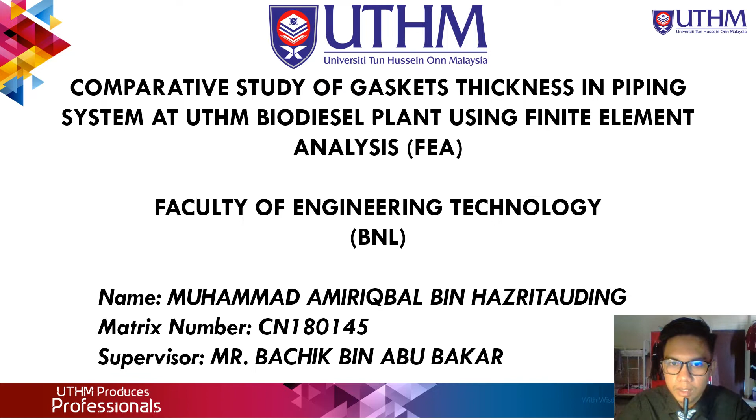Now I will talk about the introduction. As we all know, there are several kinds of plants in the world, for example chemical plant, refinery plant, and petrochemical plant. These plants use pipes to transfer working fluid such as water, gas, and liquid from one location to another. This system we call the piping system.

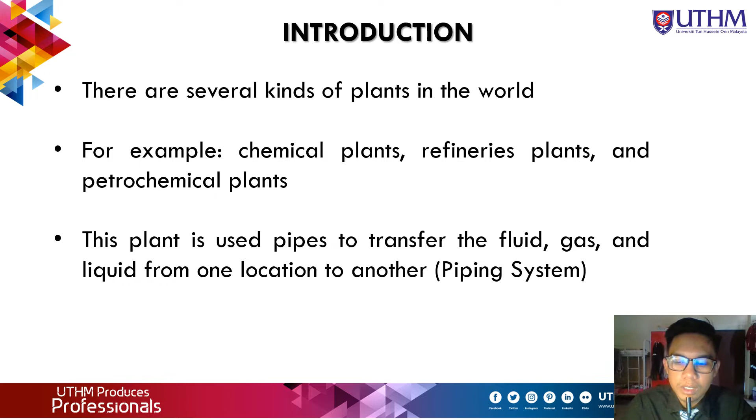The purpose of this project is to study the effectiveness and thickness of gasket between flanges in the piping system to reduce the cost of production. Gasket is a very important thing in the piping system. Its function is not only to provide a seal, but also to prevent liquid from escaping, and it is important for the safety device.

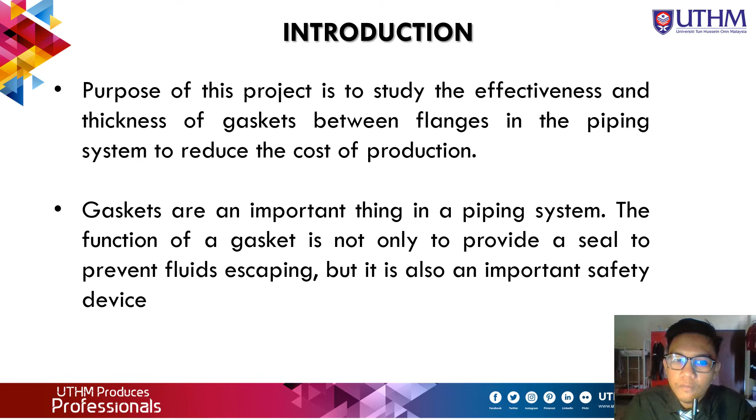Now I will talk about the objectives for this project. There are three objectives: first, to compare the von Mises stress, displacement, and equivalent strain of the gasket thickness in the piping system; second, to study gasket thickness in the piping system using a simulation technique; and lastly, to predict the mechanical properties of the gasket to reduce the operation and maintenance cost.

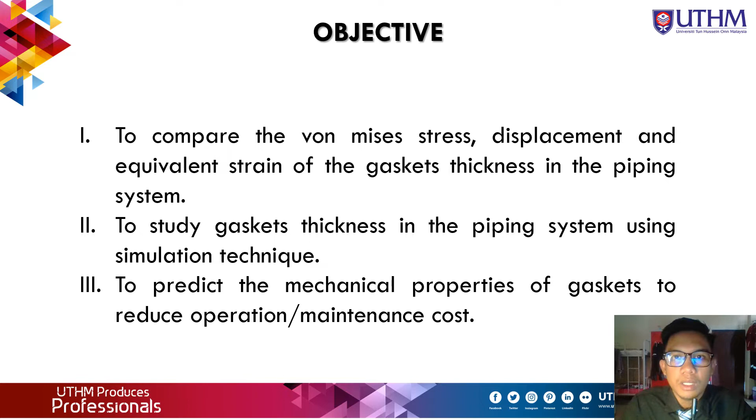For the problem statement, at the plant there are many equipment such as pump, boiler, tower, cool tower. During the startup process there is pressure, and this different pressure during startup can make the equipment damage. Besides that, the gasket between the flange can also be damaged, and if the gasket is damaged it can make the piping system not work properly due to leaks.

Instead of experimental study, it is better to study with the simulation method to save time, to save main cost, manpower, and for safety.

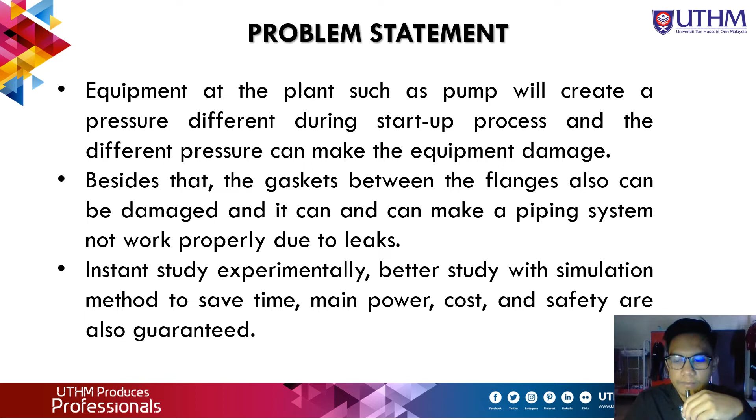Next, I will talk about the scope for this project. This project uses carbon steel pipe, and the code for carbon steel pipe is ASTM A106. The working fluid for this piping system is water, and I use SolidWorks software version 2020 to make the simulation.

Next is the material of the gasket. I use rubber, that is Neoprene rubber, and the code for the non-metallic rubber is ASME B16.21. The pressure for this project is 4 bar or 58.0151 psi. The pressure is from the suction of the pump.

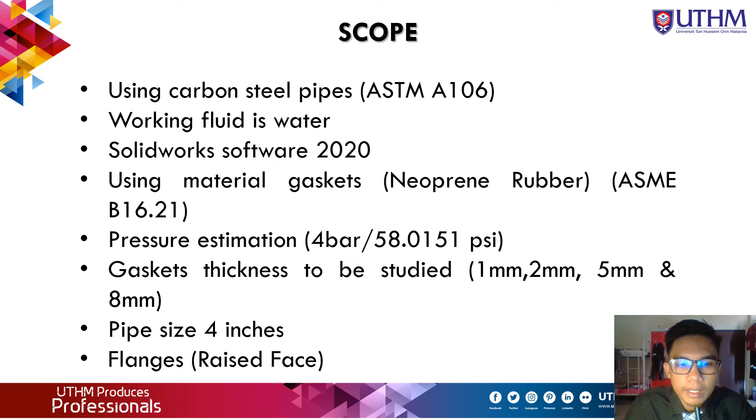The gasket thicknesses that I will be studying are 1mm, 2mm, 5mm, and 8mm. The pipe size for this project is 4 inch, and for the flange I use the raised face.

This is the methodology: first the project title selection, find the article and journal, select material. For the material, I use two types: rubber and carbon steel. Next I have to fabricate a 3D model.

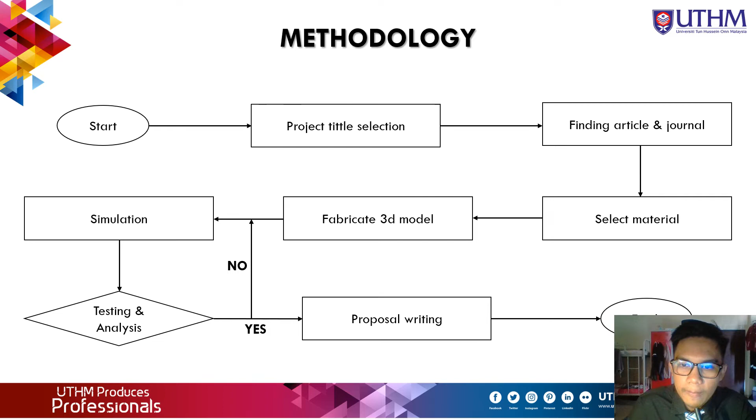For the 3D model, there are 4 parts that I have to fabricate: pipe, elbow, flange, and gasket. After completing the parts I have to make an assembly, and after completing the assembly I will do the simulation for testing and analysis. After that I have to do the report and summarize it, and lastly I can submit it to the panel and the supervisor.

Next is the methodology. First I have to fabricate the 3D model using SolidWorks software version 2020. The 4 parts that I have to fabricate are pipe, elbow, flange, and gasket.

All these parts, the pipe material is carbon steel, except for the gasket. For the gasket, I use rubber.

Next, simulation. There are 2 simulations that can be done from SolidWorks software version 2020, that is CFD and FEA. FEA stands for Finite Element Analysis, which is mostly about studying or analyzing the static pressure. From the analysis I can get the results for von Mises stress, displacement, and equivalent strain.

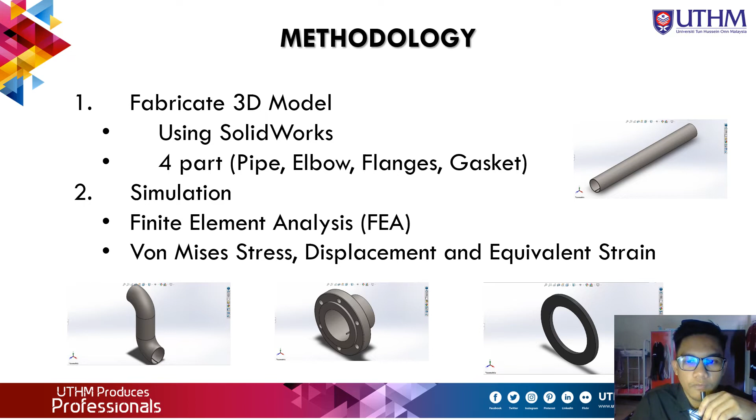From that I can conclude that the 8mm gasket has the highest von Mises stress and displacement, while the 1mm gasket has the highest equivalent strain. The factor is that the 8mm gasket has higher von Mises stress and displacement because of the pressure applied to it. The 1mm gasket has the highest equivalent strain because the thinness of the gasket can make the rubber or gasket get pulled.

This pulling makes the strain increase more. As we all know, rubber is a soft material and easy to strain, but rubber material is very good to be used in the piping system that flows water as the working fluid.

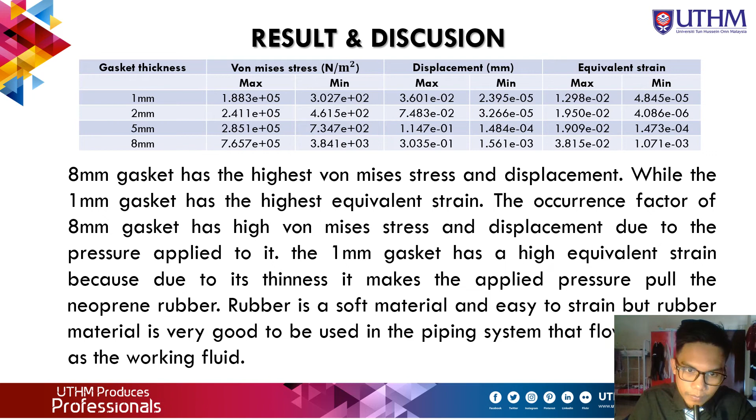Next I will talk about the conclusion and recommendation. Gasket is a very important seal in the piping system. If an inappropriate type of gasket is used, it can cause serious problems for the system. In selecting the gasket, it is important to evaluate the process, fluid pressure, and temperature.

The analysis is very helpful in this project because it can help determine what gasket is suitable for use in the piping system. The result from the analysis can show the critical part of the gasket during the process. So from the conclusion, the 8mm gasket is the best gasket and can be used in the piping system because it has high pressure resistance.

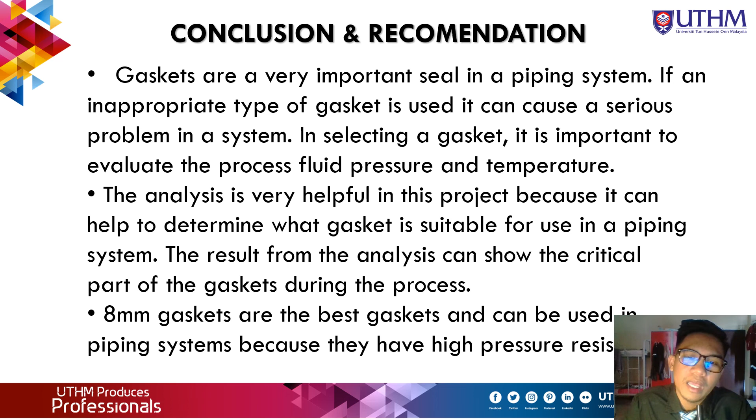This is my recommendation. At the end of the project, there are several gaps and certain things that need to be improved for better results. There are two recommendations that might be useful. First, students should get hands-on experience by doing maintenance at the Biodiesel plant UTHM.

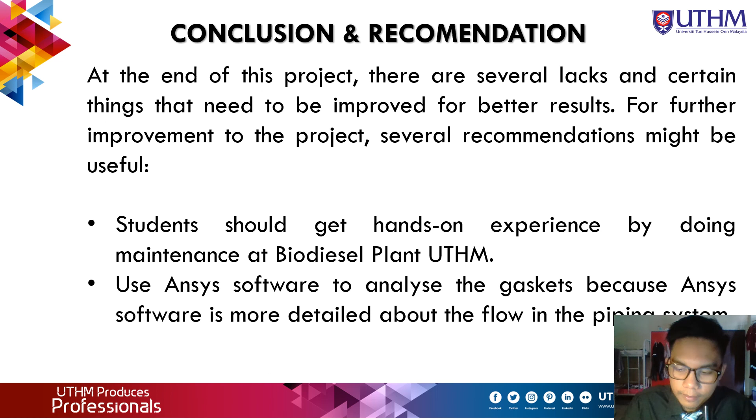Second, use ANSYS software to analyze the gasket because ANSYS software is more detailed about the flow in the piping. I don't say that SolidWorks is not good, but using ANSYS software is better. You can get better and more accurate results for the gasket. Alright, that's all from me.